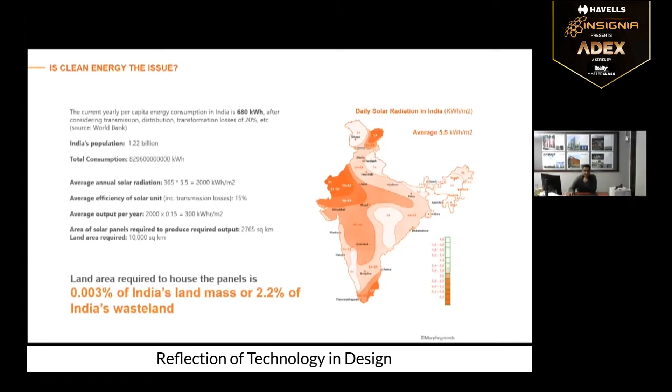And just very broadly speaking, India has a daily solar radiation which is on average 5.5 kilowatt hours per square meter of the country's land mass. We only really need 0.003% of this land mass if we were to drive our entire energy by solar. It's actually nothing. It's only 2% of the wasteland, the deserts of India, that we would need to drive all the energy, not for today's requirement, but for what is projected for 2050.

Optimization has been mostly about how do you build less? How do you do a lot more with a lot less? And essentially that's about removing embodied energy, and reducing CO2 emissions from how you build something. Uniqueness is about, again, a set of metrics which looks at tradition, heritage, and culture.

And that third philosophy and third arm grows from the fact that across India, given that price points of construction are extremely frugal, everything started looking the same. It didn't matter whether you were in a cold climate, a temperate climate, a hot climate, or a warm, humid climate. By and large, most buildings started looking the same. And that's because they were adopting processes of construction and design that allowed for that to happen.

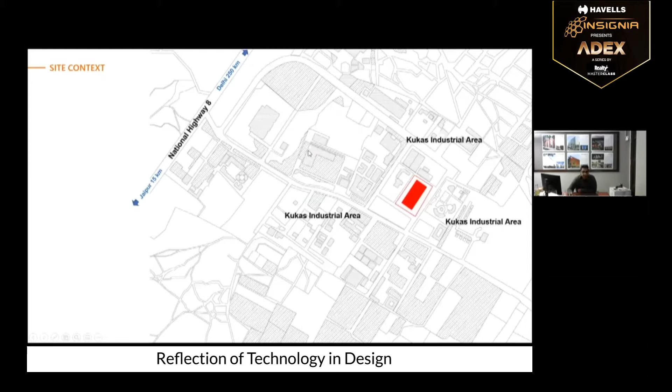And we began thinking about how we were going to be able to build this building. And the first thing that came to our head was to throw out the air conditioning. Because you throw out the air conditioning, along with that, you reduce all the electrical equipment, but more so, the power generation is also done locally. So you have these diesel generating sets that generate that power, and you get rid of that as well.

And we studied a lot of the traditional architecture. We used computational models to understand how step wells work, why they are cooler at the bottom than the top. We understood evaporative cooling, jalis, ventilation, shading. So we mapped out a 200-kilometer radius. We said every material that we will use will come from that, because transportation costs are extremely heavy.

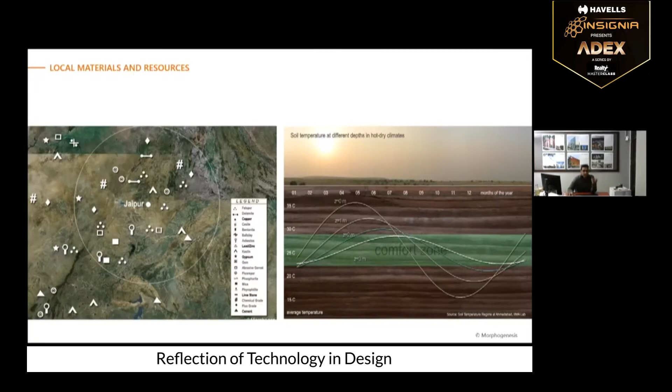And the other thing that we discovered at the time was that the temperature of the Earth about 3 meters below the surface is equal to the average temperature of the region. And in Jaipur, which goes from 0 to 48, 49 degrees, the average was floating around 25. And that's very useful, which is why if anyone has visited India and goes to a step well and comes down, it naturally feels cooler, because earth banking along with evaporative cooling is a phenomenal cooling mechanism. It's an underground air conditioner, naturally driven.

So we said, fine. Now, typically speaking, any institutional building in India would be built as a block, and then you would have the open space, which is the recreation space. But when you're in a desert climate, that open space is really worth nothing. These large outdoor spaces become mostly unusable through the year. And we said, well, we won't do our building vertically. We'll spread our building out and use the whole building as a shade, like a tree. And therefore, the space under the building will become viable.

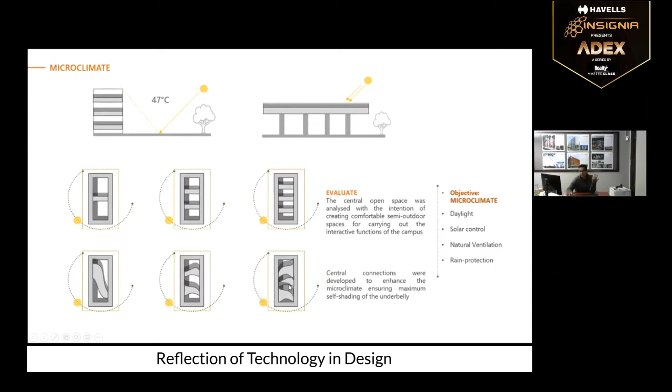We did a very optimized, simple rectangular form. The idea was again to decrease the amount of surface area that gets exposed to heat gain. And we went through a series of courtyard morphologies, the idea really being to keep the sun out, but let the daylight in. I'm not going to show you these diagrams. All of you probably know them very, very well.

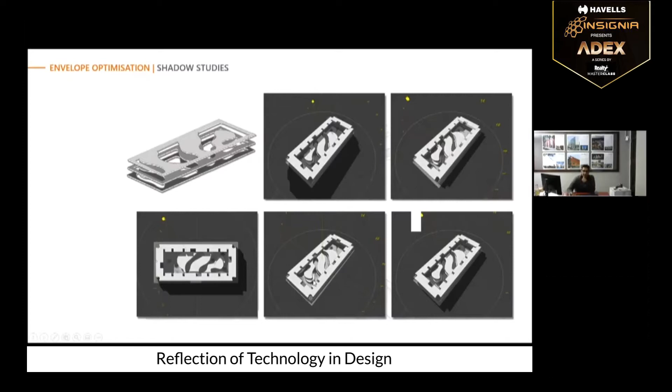But the idea really was, because it was a design and fashion school, the emotional element was that if you were inside this very rigid form, which was driven by our environmental criteria, the courtyard should not be like a rectangle. It should flow freely like a Mobius strip. And that was the model when we began about a decade back.

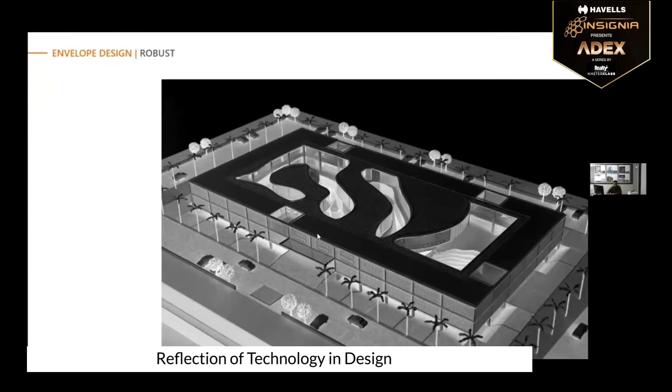To achieve the parameters without air conditioning in a desert climate, we sunk down 3 meters. We recycle all the rainwater and we recycle water from the toilets by filtering and using a treatment plant. And we created our own step well, Bavli, in effect, which allowed for evaporation through the courtyards and cooling the building internally. And that sort of negative space, if I may, was pulled out of the program.

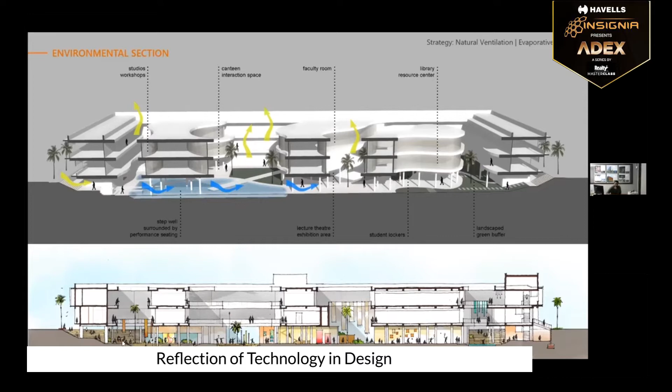So we were supposed to build about 25,000 square meters. We built about 2/3 of that. And that entire area underneath, which to date operates at about 28, 29 degrees Celsius naturally, is used for an outdoor cafeteria, for various functions, performances, etc. And that whole underbelly section was designed to do that.

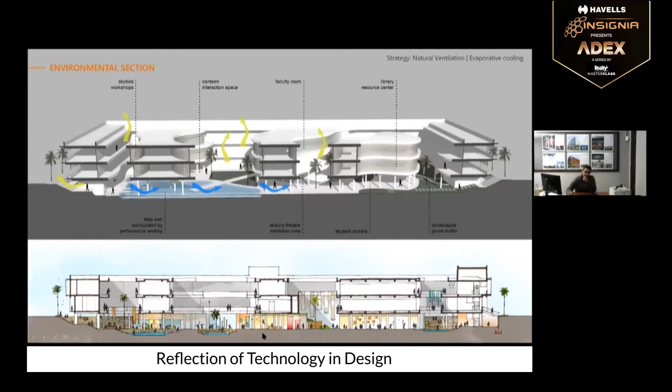These are just some of the pictures of that step well that we created. All the water is harvested. Not a single drop of water leaves the site. We were just trying to work with limited resources effectively. And obviously, the whole thing sits in shade. It captures the wind flows and it cools the building down.

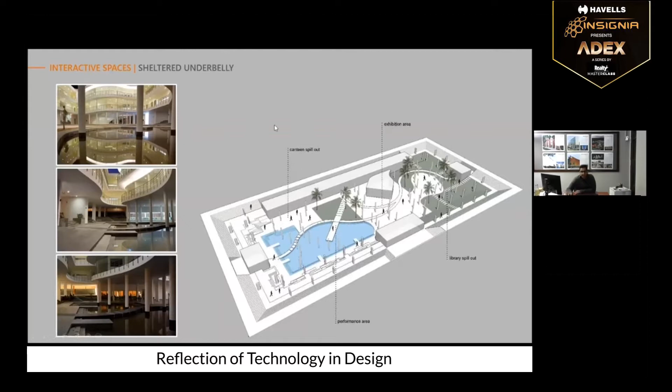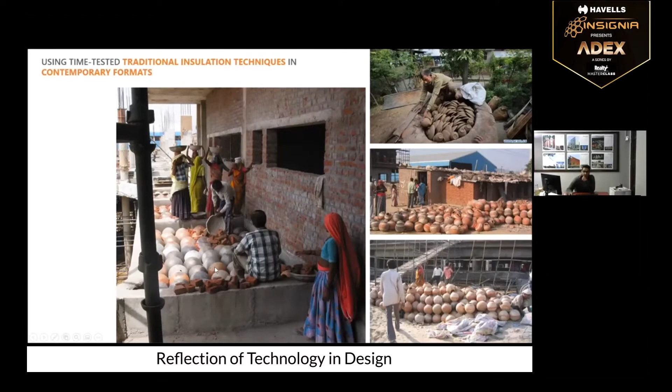We looked at insulation. Insulation was very critical for a project like this in a desert climate. And there was a local community that made pots. We couldn't afford the very expensive 50 mil glass wool or rock wool insulation. And we thought that pots, which were used traditionally, would make for great insulation, because air is a great insulator. We used these inverted pots with a layer of screed on the top for insulation. The pots were made on site by this local potter community.

For the external skin, we kept our window-to-wall ratios very optimized. We're at about 20 or 25%, providing adequate daylight. And we created this buffer space, which is essentially a service space and a screen. The screen is made by a local community who make cement concrete jalis on a very simple system. And we ran all our services on the outside. So the screen allowed the entire windows to go blinds free, and the design of the screen changes based on the orientation. And all the services are openly accessible.

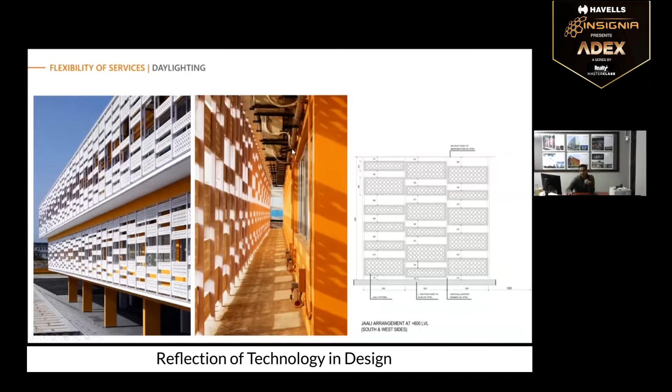The sprinklers run here. We use the sprinklers as a facade cleaning system, because once a month they are supposed to test and flush it. So that cleans that up. And that's the building when it was finished about a decade back. All the materials, the stone, everything here was from within a 200-kilometer radius. We did achieve the price point.

And this building went on to become very popular with various schools of architecture. They've gone and studied it. We've had students from various masters programs studying sustainable design, recording temperatures. And for the last decade or so, consistently in the summers, when external temperatures have hit 47, it's hit 29 degrees inside without air conditioning. It runs on an energy performance index of about 25 to date. Very simply, we get the bill and just divide it out.

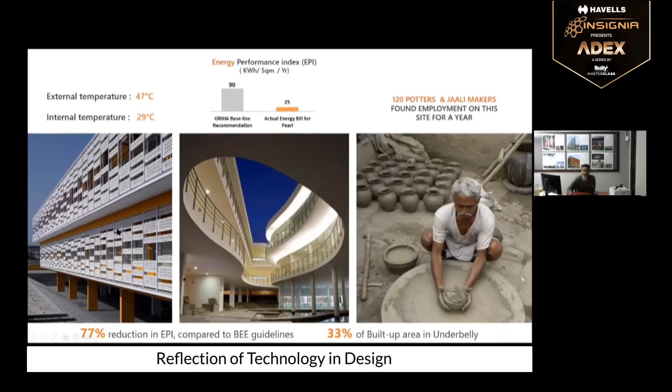And whilst it was being built, it gave a certain level of employment to the local community. And that gave us a lot of inspiration. We thought that, if it was possible to get an 18 degrees delta by passive design, and possible to create something at these price points, pushed by the adversity of price, then what could we do as we moved on? And that's when we started putting more formal metrics.

Which is why I'll jump to a very different kind of building, the British School in Delhi. That's a composite climate. And here, budget was not an issue. Our brief, to begin with, because it was the British School, was that they wanted it to be centrally air conditioned. All British schools pretty much all across the world are either centrally heated or centrally air conditioned. And we argued that if we can achieve as much as we can naturally, then we will do so. This project is about 6 or 7 years ago.

And we then spoke to the clients, which was essentially the High Commissioner and the board, and we said, why don't we look at this 5-acre site and try and do India's first net zero energy, net zero water, net zero waste to landfill kind of building. And they said, fine, let's give it a shot. So we did the math on the water, and from the 5 acres of land that we had, I'm not going to go through the calculations, but we could support a population of about 1,300 students.

And we said, we'll do this in reverse. We said, so the notion of carrying capacity comes from the fact that what the land can afford in terms of water and energy is all that we will build. And 1,300 students work very well for them.

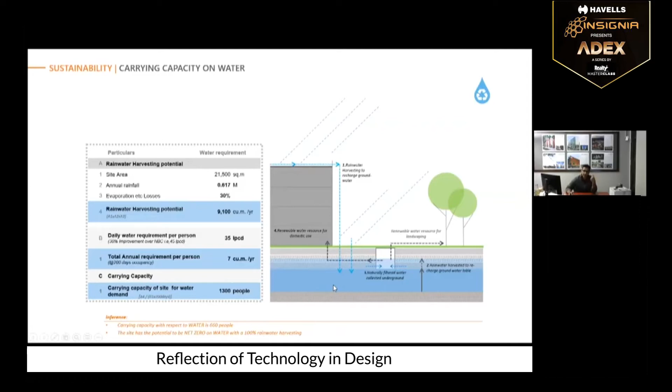Now the problem with a city like Delhi is all our rain is concentrated in 3 months. You can't store that much water for the rest of the year. So what you do is you dig down and you find an aquifer that's pure, and you use that as an underground tank, and you use that as an exchange. So you put water back into it and you pull it out of it. And over the year, you go net zero on whatever 1,300 people.

We took the same 1,300 people, and then we went about building out how much, because we needed to build about 20,000 square meters for fitting out an IB school. And we were trying to work out what is the correct ratio of rooftop solar to number of levels that we would need to be able to get to net zero, and therefore what would be the target EPI that we need to achieve. And after a lot of to and fro, we came to a 4-story building with a target energy performance index of 56 kilowatt hours per square meter a year.

Now that number would by necessity drive a lot of passive design, where a lot of the heat loads and a lot of the lighting loads would need to disappear. And that's when we would be able to be net zero on water, net zero on energy. And again, in Delhi, there's a very old city called Shahjahanabad. We looked at how those morphologies worked, how some of the earth banking worked.

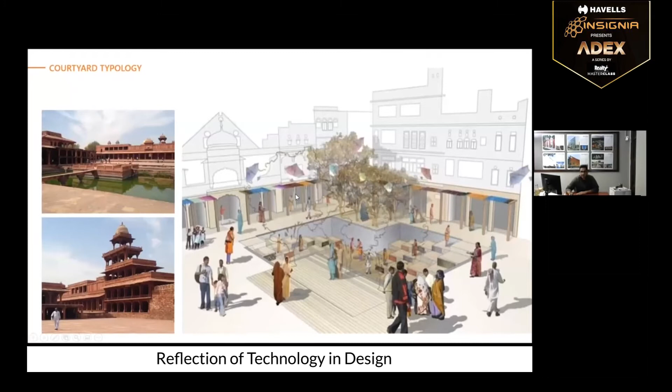The other also key area was safety and security. And because we were propagating the idea of having open corridors, and we were not doubly loaded and had them air conditioned, the issue of security, CCTV cameras. We didn't come up with it, we studied this idea of eyes everywhere. And if you look at any old vernacular evolution of any city anywhere in the world, in those days when there was no police several hundred years back or CCTV cameras, the cities were designed in a way that there were eyes everywhere. And that really was a security.

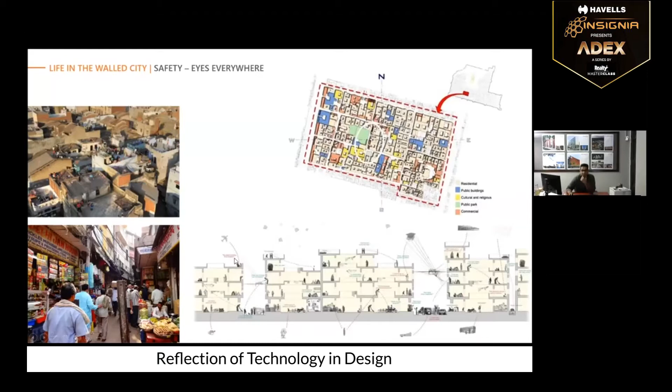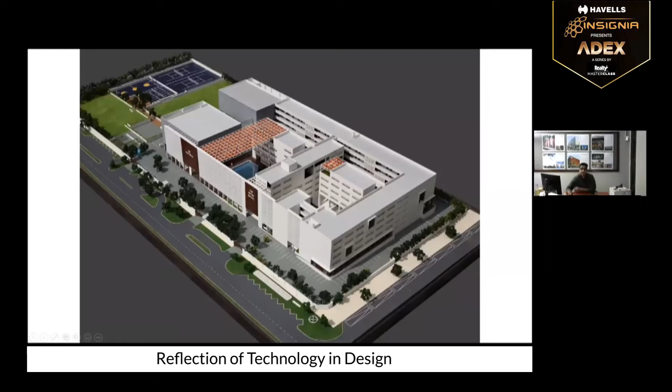So a combination of the two factors, we began to look at morphologies where we would be able to get eyes everywhere, step terraces, shaded courts, and we sort of landed up with this sort of model with a rooftop area sufficient to make this into a net zero energy project. Some other small things that we did, we put the labs on the top because the labs are constantly mechanically ventilated because of the fumes, and that automatically creates a buffer for everything underneath. We created natural voids for the wind flows to allow for the courtyards to function properly.

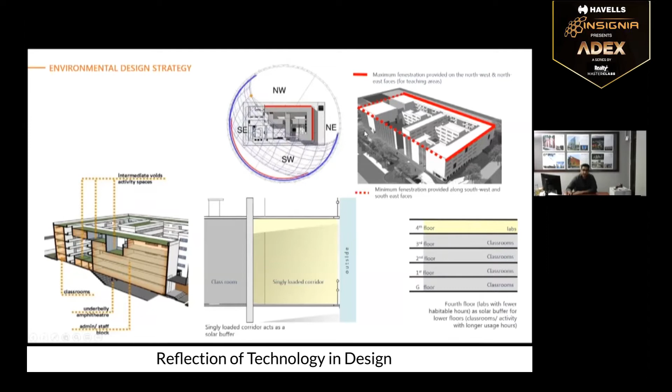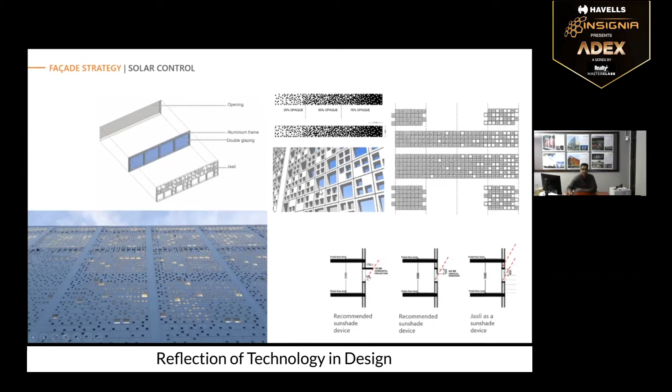And because of the orientation of the site, where we had pushed that form again like we had done earlier, we began to look at the Jali formation. Most of our teaching areas were on the northeast and the northwest, while the southwest was essentially a large screen just shading out the courtyards. A lot of this was built on site, so we came up with the sort of construction methodology of, again, full windows and having a secondary screen. The screen, of course, varies its opacity and density based on what's behind it and what orientation it works to. And that's sort of now the completed building.

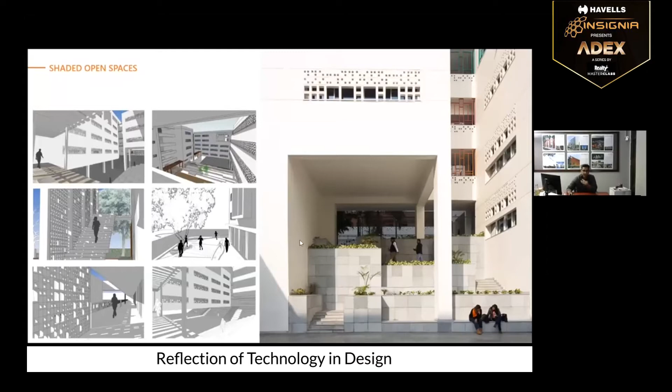We did a lot of modeling, so we had the classroom, and that was done perfectly. But to us, what was more important was to be able to create enough open spaces within which would be comfortable through the year. And we were targeting a delta of about 8 to 10 degrees in perceptible temperature in the outdoor areas in the school as compared to the external temperature. And then here's that project. So that's the front screen that shades off the southwest and sort of creates a full microclimate behind.

Again, open corridors. What you see here are air filters because it was a British school. We didn't air condition the entire school, but we did for the classrooms, and then create these sort of passive spaces. A lot of outdoor spaces. Now, this is a bit old, but the trees are grown now. Yeah, and that's the school.

Now, on our post-occupancy, we to date have an EPI of 52. It's the only school in India right now which got a GRIHA 5-star rating. GRIHA is India's own green rating system. And as I am a founding member of the green rating system, I can say that it is genuine. I didn't falsify any data, but it's operating at a 52.

Now, what you see here is a combination of surface temperature and air temperature, and then we sort of map that back to perceptible temperature. So at a 44 outside, we did manage to get a 10 to 12 degree delta in all the open spaces inside that school. And we keep our classrooms at about 26 to 28 degrees. So there is a gradation as one steps out and moves through this entire project. And it operates today as a net zero on all accounts.

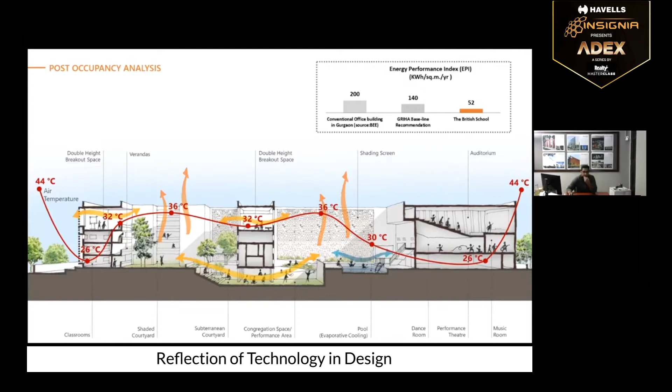So that was in that sort of composite climate. In a composite climate, the winters aren't a problem. The real problem is not even the summer, because shade, thermal mass, screens, a bit of evaporative cooling, that works. The real problem has always been the monsoon. Why it works really well in schools is that Indian schools are shut in the monsoons. That's the holiday period, and that works really, really well, which doesn't in other kinds of typologies like offices or residential, which brings me to this third one.

This is a campus. It's a 100-acre campus for a very large technology IT firm called Wipro. They're amongst the 3 largest listed companies in India. And they do these really massive campuses, with tens of thousands of people working there. This is located in Hyderabad, in Telangana.

It's a very strange sort of climate. It's not very adverse, but it's got a tremendous amount of diffuse radiation. It has barely any cloud cover pretty much through the year, and temperatures do go up, but not that high. It has reasonable wind speeds, reasonable wind temperatures, but the glare is just incredibly high. The diffuse radiation is what pushes temperatures up. And we worked on this project with Transsolar. It's one of the several we've done with them.

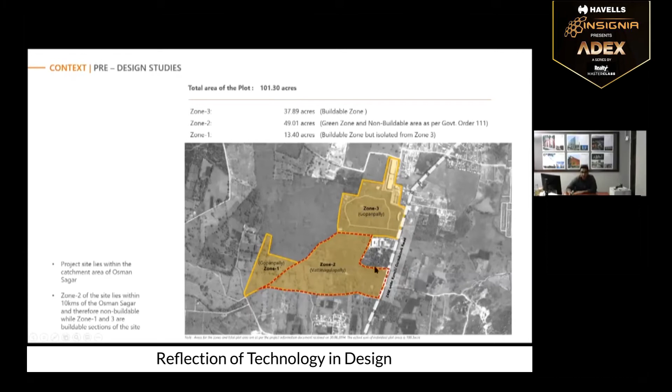And this is where we began. So we looked at the site, and that's about 100 acres. It's divided into 3 zones. And zone 2, as we discovered, was largely unbuildable because it sat in a radius from a lake which wasn't too far away, and it's a bit low-lying. And the really buildable areas were these 2.

We again pursued the idea of a carrying capacity. We had the 100 acres, and we worked out backwards as to how many people we can support from the rainfall. And to store that water, because Hyderabad is very strange in the sense that its entire geology is slate rock, it was very hard to get to an aquifer and do water exchange with. So we really had to build a reservoir. At a 4-meter depth, we needed about 15 acres of water reservoir to support 15,000 people working there.

And similarly with energy, we worked out that if we hit a 60 EPI, then with 15 acres of a solar farm, which we have planned over and above the water reservoir, so essentially the solar farm shades the water from evaporation and picks up the energy, we will be net zero on both accounts. And that's what we really did.

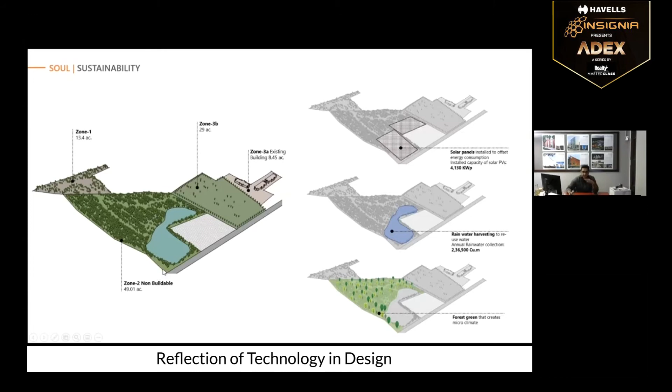So we identified the low-lying area. Everything slopes there. We get the natural rainwater. It's a 15-acre lake, about 4 meters deep. And then it's got the solar panels that sit on top of it and on the site and shade it. And that piece of the land will never get overshadowed. So we could do the solar farm, 15 acres, on the site itself. And that set up the basis of the first series of master plan.

The second exercise was, as I'll just go back, how do we begin to hit 60 kilowatt hours per square meter per year, of which 25 is on primary energy, which is lighting and air conditioning or ventilation, and the 35 is on equipment. And how do we begin to get our building to work with the 25? The 35 was a given, so that's all internal equipment.

The question really was, how do we work to 100% daylighting on the floor plate, and how do we bring our air conditioning requirements down through the year. And to remind you, these buildings tend to operate about 10 to 12 hours a day, 365 days a year, because they're essentially very large tech companies.

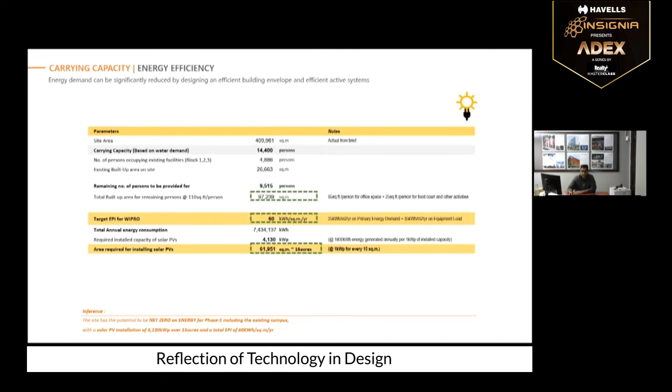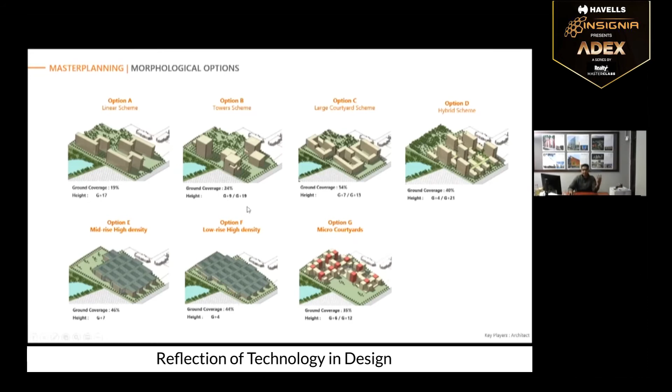So we began this exercise where we did about 7 of them. We did many more, but we isolated 7 morphologies which were built upon isolated single towers, a series of square towers, courtyards, a hybrid of the tower and the courtyard, mid-rise high density, low-rise high density, micro courtyards, and we came up with several morphologies heuristically. And then we began to test them. So various kinds of ground coverages, various heights. And we then put them through a series of analysis.

So the first analysis that we did was, of course, for wind, because wind was critical for us. If we were to hit that 60 EPI, which is 25, we also needed to be able to get a lot of the functions from inside the building out, and a lot of the functions to run passively without air conditioning. Of course, where the essential work was happening would be air conditioned for various reasons; their data centers need very tight control on air conditioning, etc. But how much of this could be sort of, and for that we needed the wind.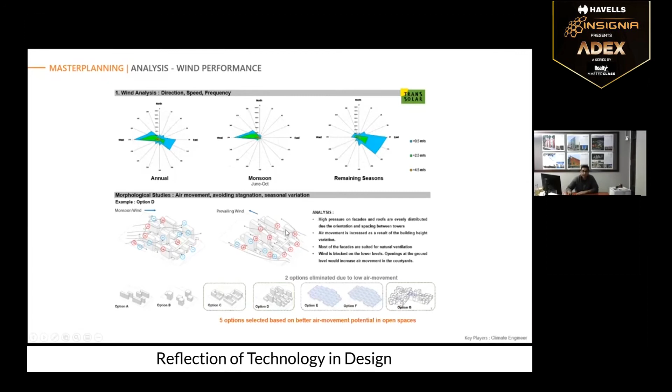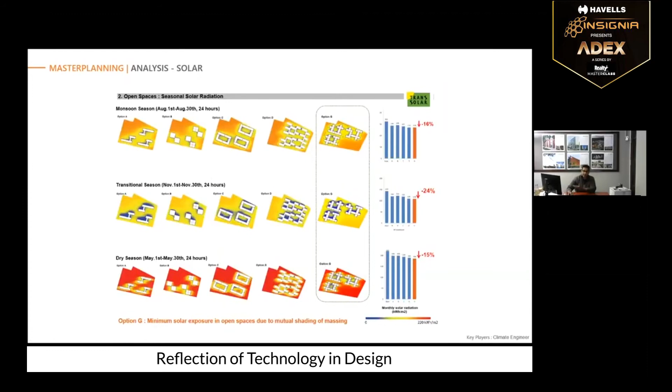Now, predominantly Hyderabad had an east-west wind, and we put all these various forms. We selected 5 that performed reasonably well. We then put them through the horizontal plane. We were trying to look at, in terms of seasonal solar radiation, what the insolation would be on the lower planes, and on that basis we picked up a certain scheme. We then looked at daylight autonomy for each of these 8 or 9 different schemes, and then again began to identify. And this was a highly iterative exercise between wind, solar radiation in the open spaces, and daylighting within the internal spaces, and what morphology would suit it the best.

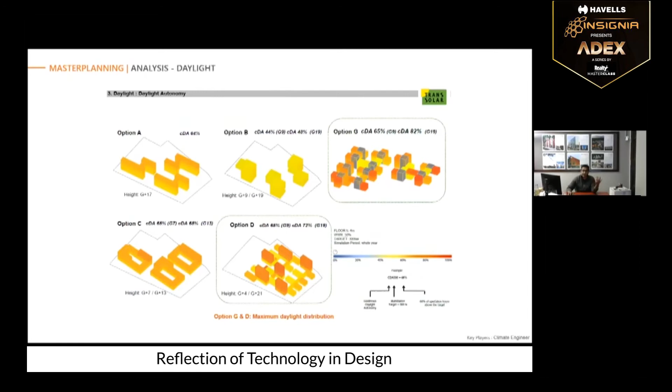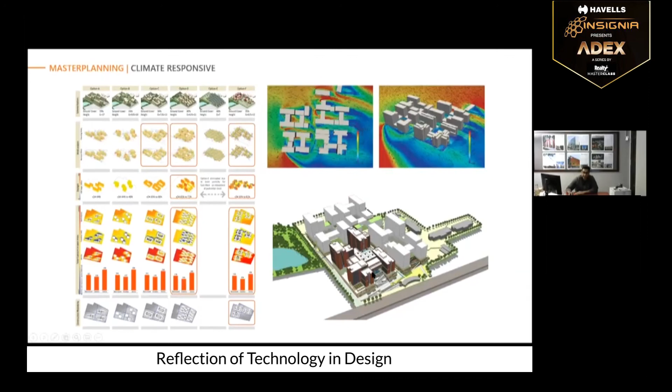And finally, we selected the option which was the micro courtyard option. And after doing a series of CFD runs on it, we cleaned up the entire model. Again, this was highly iterative. And if anyone is very good with algorithms, this is a great one for that kind of process. And then we finally ended up. So the first phase is what is now under construction, which I'll take you through. And then we've already done the urban design for the remaining 3, so that in a sense, the wind flows, the evaporative cooling, the shading, all those parameters remain the same.

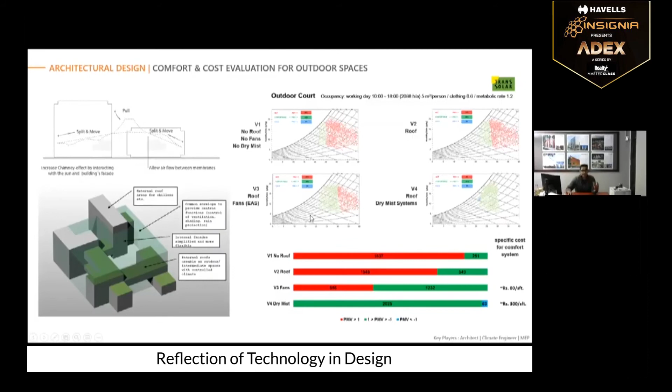Coming to that first phase, which is approximately 1 million square feet, about 100,000 square meters. We began looking at the outdoor spaces, and we went through a series of analysis, looking at a combination of having no roof, no fans, no dry misting, and having only a roof, like a lightweight tensile roof, a combination of roofs and fans, plus dry misting. And we then did a cross analysis of what would be the financial savings vis-a-vis these spaces sat inside air-conditioned spaces.

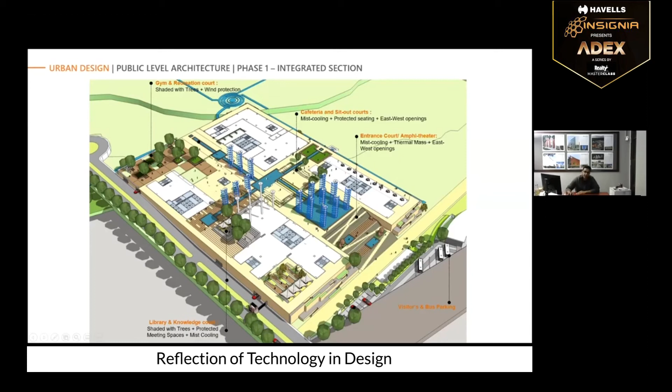And that led to this design, which I call a large desert cooler, very traditional. A desert cooler is essentially what used to be there before air conditioners, a box with a fan, and you had this hay on the side where water ran down, cooled it, and shoved it through. And so the entire plane, which sits on an elevated podium, was designed for those wind flows and those outdoor spaces.

And we worked with SBP. We got this height with this tensile roof in combination with Transsolar and us, and we got this entire outdoor space working in a way that it is comfortable through the year. So it's comfortable for rain, it's comfortable for the summer, it's comfortable for the winter. And by and large, this entire outdoor space now takes on primary functions.

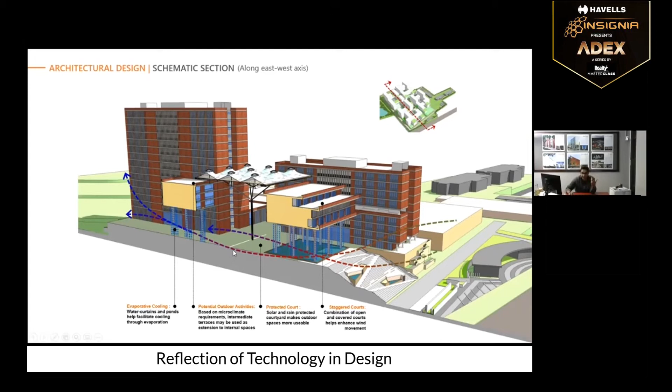I won't spend too much time on the indoor spaces. We went through a similar exercise of looking at various kinds of mechanisms of how we can remove as much air conditioning from the inside, whether it's underfloor, with heat recovery, hybrids, low velocity fans, and came to an optimal solution. Again, a lot of this is very cost-based, but it's a combination of sustainability and cost.

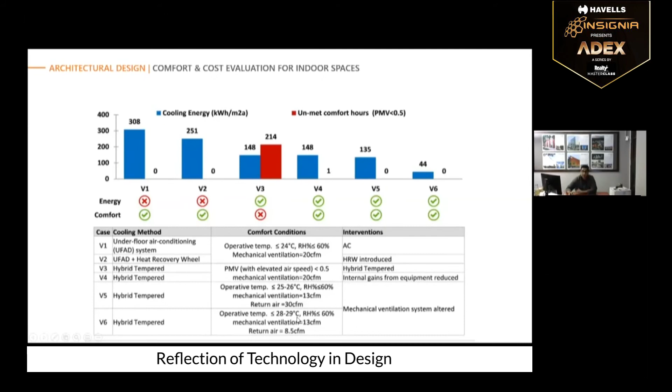And of course, settling for the fact that our client agreed to an internal temperature of 28 degrees, which is very useful, and it's actually correct, because external temperatures can go up to 38 to 40 degrees, and working out the whole system based around that.

So when we finished the design, 56% of the area was under air-conditioned space, but consuming less than half the air conditioning. Typically speaking, in this region, a building would consume 250 square feet for 1 ton of air conditioning. This project is operating at about 650 square feet per 1 ton of air conditioning. So even though 56% of the spaces are air conditioned, they're consuming less than half. About 35% have been moved to natural ventilation.

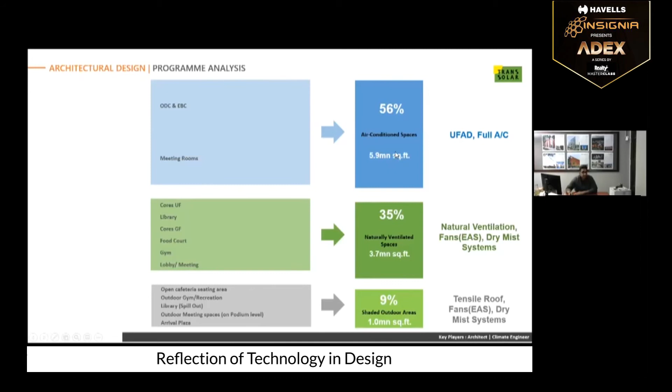So effectively, only half the building is air conditioned. This typically would be at 100%. Okay, so dramatically different project.

This sits in Kolkata, which is the extreme east of India. It's got a warm, humid climate, extremely humid, and temperatures don't change very much through the year. It's very close to the sea, but it's also in some senses the cradle of civilization. A lot of the first universities, the first art, knowledge, culture, music, a lot of that was born in this part of the world, in this city particularly, and we began looking at the site.

Now, I think the total area here is about 3 million square feet, about 300,000 square meters, and it's a 17-acre site. Now, we did the math on this. We couldn't push this one to net zero because, like I mentioned earlier, in any environment that is highly humid, the city maintains greater than 70% humidity pretty much through the year. And therefore, in a mixed-use environment consisting of offices, hotel, conferencing, data centers, etc., the air conditioning was inevitable.

However, what we started thinking about was what we could do in terms of the entire site, and therefore we set up a site plan where we could maximize the wind flows through the site and all the buildings. Because Calcutta sits on a 22 degrees latitude, which is pretty much the tropics, we tilted the buildings 22 degrees from pure north. And what that allowed us to do was essentially shade from one side. Because when the sun overshoots, you end up shading from two sides, and it led to a 25% reduction in solar exposure.

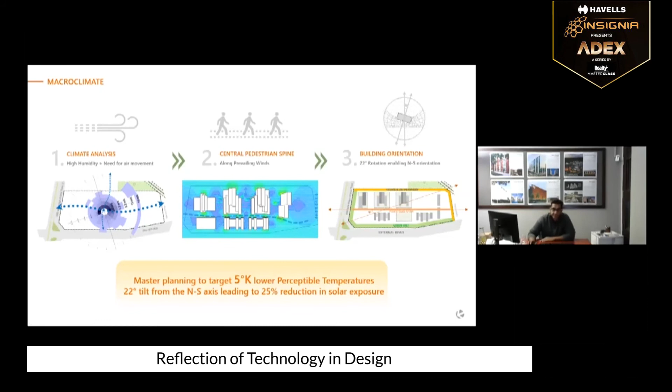Then once we had that east-west axis, we left a lot of cross axes as well, because we wanted a lot of natural ventilation. Wind speeds are not very high in Calcutta. They're at about 2.5 meters per second, but over the year, they change direction. Which is why we had to have this very free, as opposed to the previous one that I showed you, which was very fort-like and very channeled. This had to be very open and transparent.

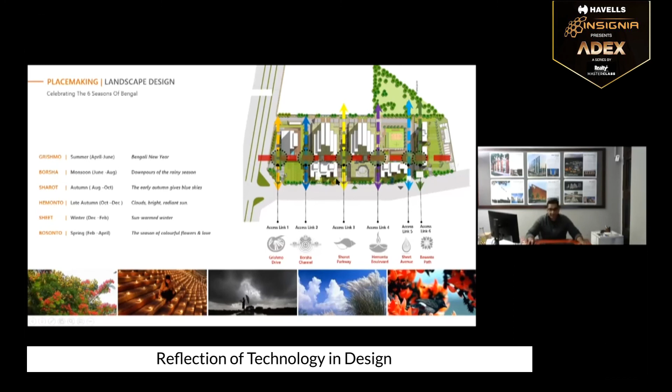I'm going to go to the landscape design of how that sort of works with the wind flows. The second problem that we had was a lot of this was very large floor plates, 40, 50,000 square feet floor plates. And by and large, what happened to large floor plates traditionally is that you get these very deep 60 by 60 or 50 by 75 meter deep floor plates, and your daylighting drops, on an sDA or if you're doing daylight autonomy, to anywhere between 40 to 50%.

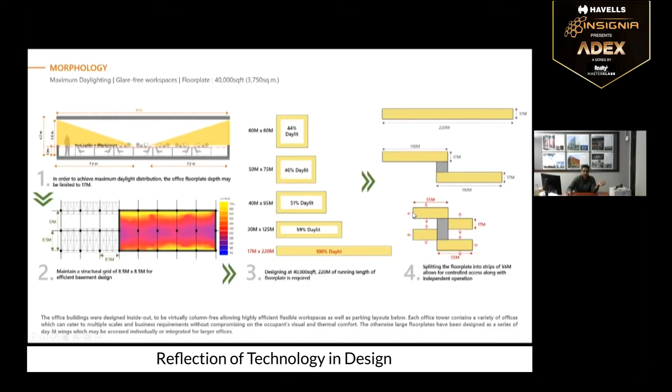And we took the same area and we changed the morphology of the building so that we could push that back to about 90 to 100%. And the point really about that is the fact that you don't really have to work with the form, which is a given. But if you go iterative, the same exercise allowed us to break this up into where we put our core and how the form breaks up, where we get 100% natural daylighting.

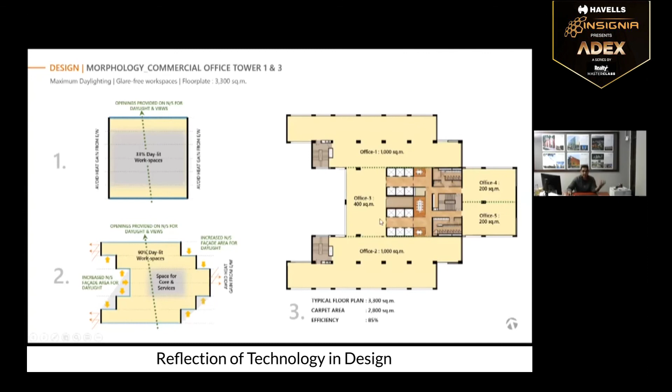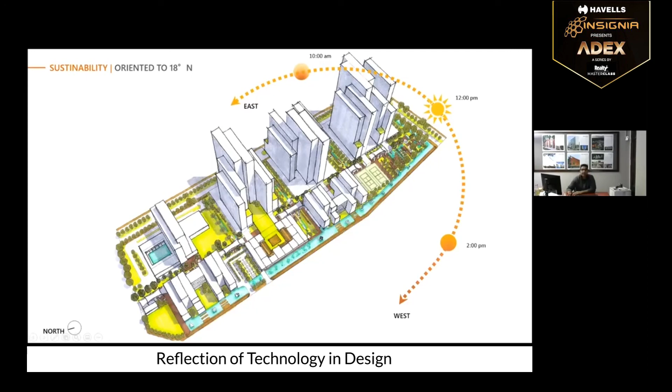So that was the final piece of design when we finished, I think, about 2.5, 3 years back. It's been in construction ever since. So we then began to look at the fact that now that we had a microclimate on the site, as you can see, this is all reasonably well shaded, it's well ventilated. We now started working with a lot of the local craftsmen. And that goes to my earlier point about, how do we work with local communities? And we found a lot of this tradition, art, knowledge, culture, and we brought that back.

So, hello? We're here. I think I would hear something. Okay. Right.

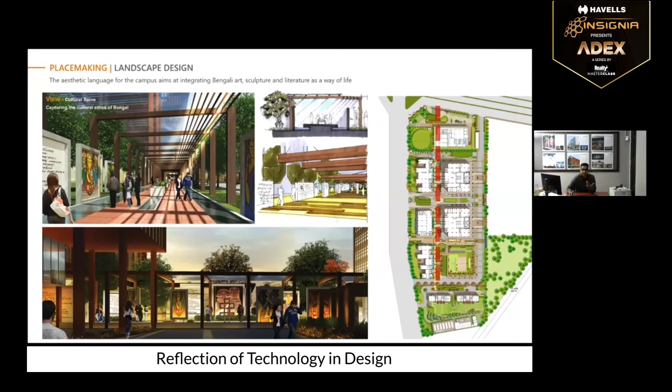Okay, great. Yeah, so we treated the entire 17 acres of the site as an open air sculpture and art gallery. Naturally ventilated, naturally weather protected, 17 acres of outdoor, if I may, arts and crafts museum. We worked with a lot of the local art schools and the local craftsmen who have this incredible craft, who make all these sculptures. And we then used a lot of the traditions of Bengal, of Calcutta, and abstracted them into this graphic artwork, which the artisans could work with.

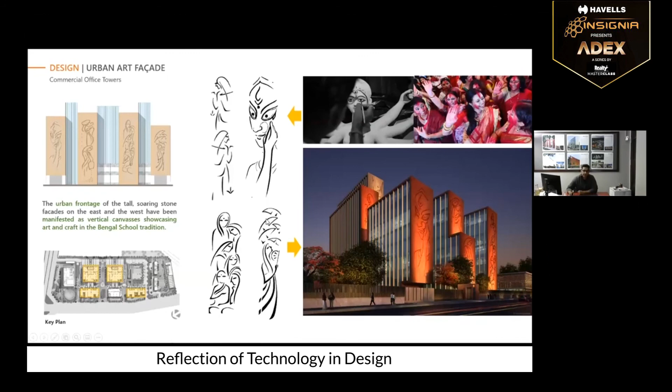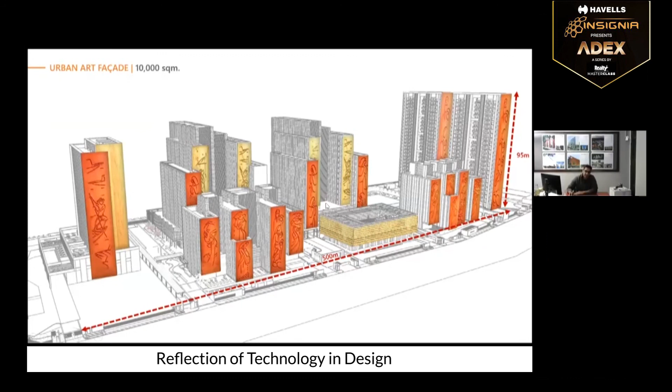And we then started using the west and the east facades, because all our buildings were north-south, albeit turned 22 degrees, and started working with them into creating this urban art form, where it provided great amounts of insulation, because they were just carving local stone. And of course, working with the local alphabet, and again, working with the stone. And coming up with this 500 meter by about 100 meter long urban art facade. This is all west. And a lot of this is being crafted by local craftsmen. And again, on the other side, on the east as well.

So that's the project, again, under construction, where a lot of this is being done on site. And this we've done as a very deliberate move; these are dying communities. Craft communities are dying communities. And I think the more we work with them, the more we learn from them. They seem to have a better heuristic understanding of what we understand computationally. And this entire 500 meter by 100 meter high urban facade is being put up by these local craftsmen, eventually leading to that on completion.

So we managed, in a very humid environment, to get an EPI of 43 by a lot of these measures. So we are 90% daylit, zero glare, which is critical because what you really don't want to do is draw the blinds if you get the glare and then switch the lights on, and it all goes south. So glare-free, 90% daylit, window-to-wall ratio at 25%. Our facade is at 1 watt per square foot envelope load design. And of course, the entire site is fully ventilated.

That's how we managed to hit the 43. And even in a humid environment, we've got a 5-degree delta in perceptible temperature. So from 36 degrees to 31 with ventilation, it works really well, even when you stand there on the site, even today.